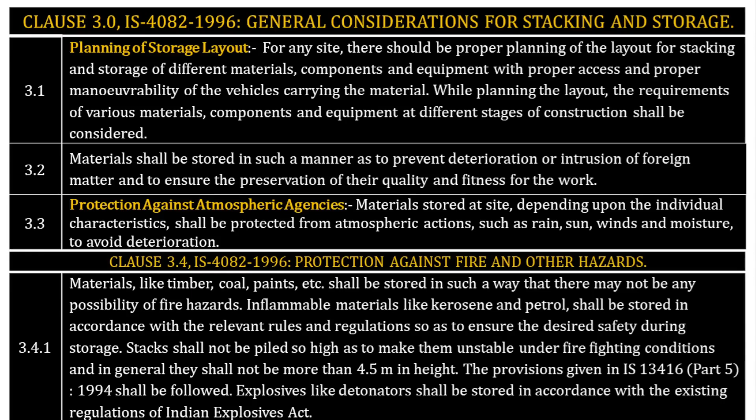Continuation of 3.4. 3.4.2 Materials which are likely to be affected by subsidence of soil, like precast beams, slabs and timber of sizes, shall be stored by adopting suitable measures to ensure unyielding support. 3.4.3 Materials liable to be affected by floods shall be suitably stored to prevent their being washed away or damaged due to floods.

Clause 3.5, IS-4082-1996, condition of stairways, passageways and gangways. 3.5 Stairways, passageways and gangways shall not become obstructed by storage of building material, tools or accumulated rubbish. Clause 4, IS-4082-1996, stacking and storage of materials. 4.1 The stacking and storage of materials generally used in construction shall be as given in 4.2 to 4.28, which have been summarized in the form of a checklist in Table 1.

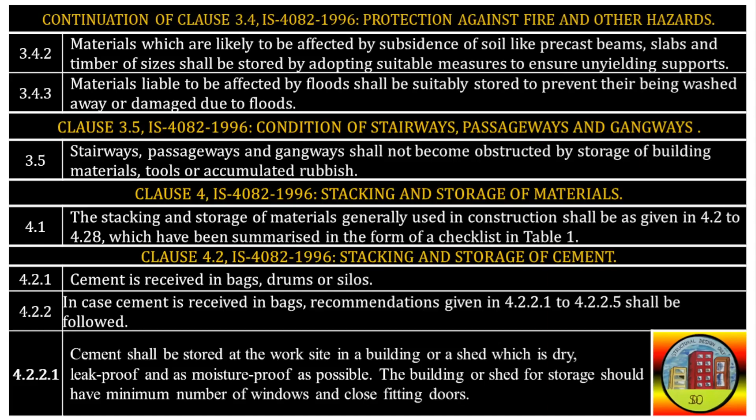Continuation of clause 4.2. 4.2.2.2 Cement stored and stacked in bags shall be kept free from the possibility of any dampness or moisture coming in contact with them. Cement bags shall be stacked off the floor on wooden planks in such a way as to keep about 150 to 200 mm clear above the floor. The floor may comprise lean concrete or two layers of dry bricks laid on well-consolidated earth. A space of 600 mm shall be left all round between the exterior wall and the stack.

In the stacks, the cement bags shall be kept close together to reduce circulation of air as much as possible. Owing to pressure on the bottom layer of bags, sometimes warehouse pack is developed in these bags. This can be removed easily by rolling the bag when the cement is taken out for use. Lumped bags, if any, should be removed and disposed of.

4.2.2.3 The height of stacks shall not be more than 10 bags to prevent the possibility of lumping up under pressure. The width of stacks shall not be more than 4 bags length or 3 meters. In stacks more than 8 bags high, the cement bags shall be arranged alternately lengthwise and crosswise so as to tie the stacks together and minimize the danger of toppling over. Cement bags shall be stacked in a manner to facilitate their removal and use in the order in which they are received. A label showing the date of receipt of cement shall be put on each stack to know the age of cement.

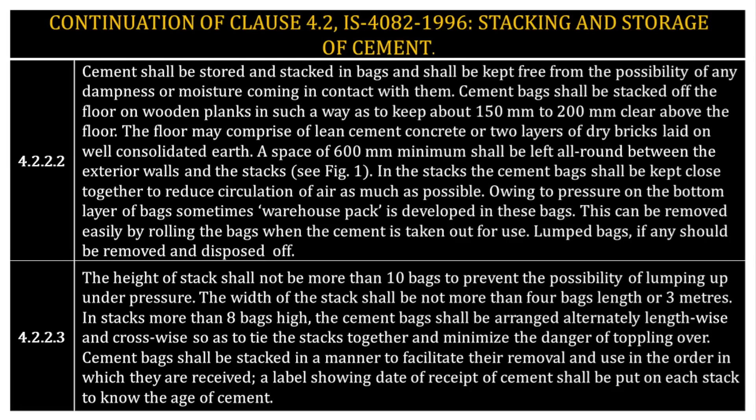This is figure 1 of IS-4082, typical arrangement in a cement godown. A, this is planks. B, wooden battens. C, bricks in two layers or lean cement concrete. D, 150 consolidated earth, below this. 1, AC sheet or GI sheet or any kind of weatherproof sheets. Number 2, load bearing wall. This is our load bearing wall. Number 3, 10 bags maximum. This is stacking of 10 bags of cement.

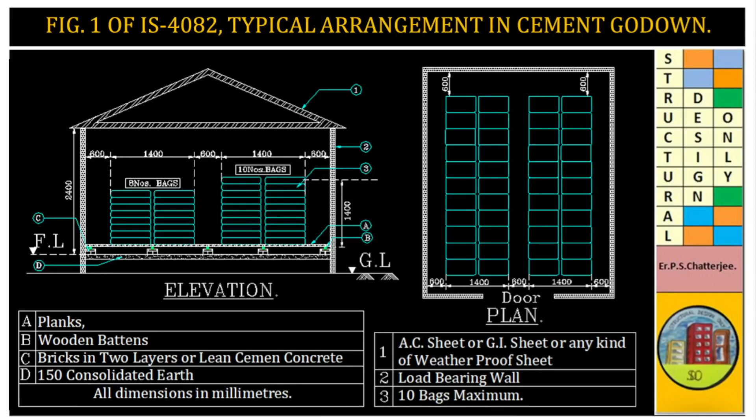Clause 4.2, IS-4082-1996, stacking and storage of cement. 4.2.2.4 For extra safety during monsoon, or when it is expected to be stored for an unusually long period, the stack shall be completely enclosed by a waterproofing membrane such as polyethylene which shall close on the top of the stack. Care shall be taken to see the waterproofing membrane is not damaged any time during use. 4.2.2.5 Cement in gunny bags, paper bags and polyethylene bags shall be stored separately.

4.2.3 In case cement is received in drums, these shall be stored on plane level ground as far as possible near the concrete mixing place. After taking out the required quantity of cement, the lid of the drum shall be securely tied to prevent ingress of moisture. 4.2.4 In case cement is received in silos, the silos shall be placed near the concrete batching plant. Proper access shall be provided for the replacement of silos. 4.2.5 Different types of cement shall be stacked and stored separately.

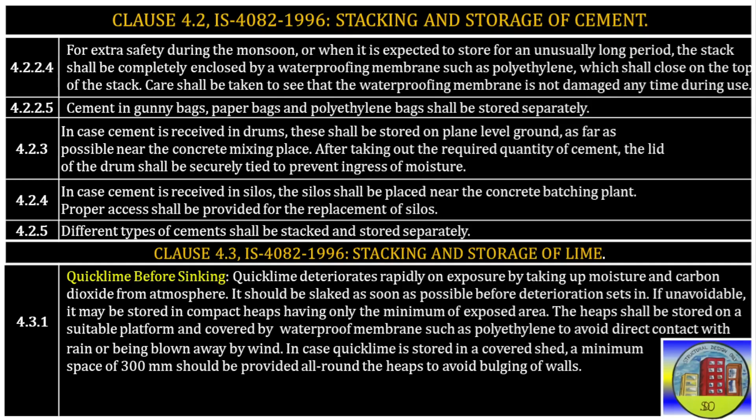Continuation of 4.3. 4.3.2 Hydrated lime. Hydrated lime is generally supplied in containers such as jute bags lined with polyethylene or HDPE woven bags lined with polyethylene or Kraft paper bags. It should be stored in a building to protect the lime from dampness and to minimize warehouse deterioration. The building should have a concrete floor and the least ventilation to eliminate drafts through the walls and roof.

In general, the recommendations given in 4.2.2.2 for storing of cement shall be applicable for hydrated lime. When air movement is reduced to a practical minimum, hydrated lime can be stored for up to 3 months without appreciable change.

4.3.3 Dry slaked lime. If the lime is to be used within a few days, it may be stored on platforms suitably covered for protection from rain and wind. If it requires to be stored for a longer period, not exceeding 2 months, it may be kept in a dry and closed godown.

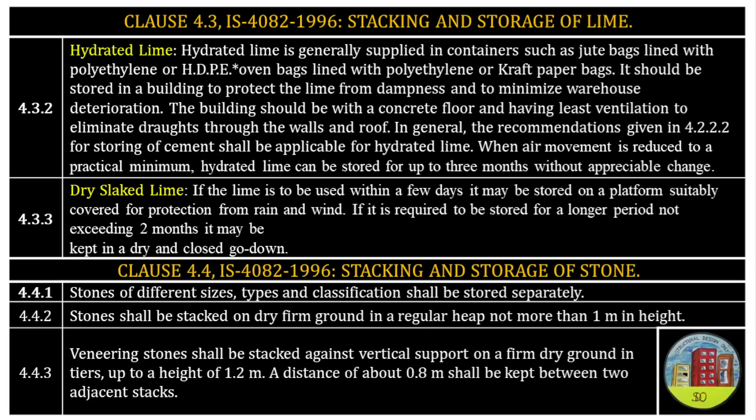Clause 4.5, IS-4082-1996, Stacking and storage of bricks. 4.5.1 Bricks shall be stacked in regular tiers as and when they are unloaded to minimize breakage and defacement. They shall not be dumped at site. 4.5.2 In the case of bricks made from clay containing lime kankar, the bricks in stack should be thoroughly soaked in water to prevent lime bursting.

4.5.3 Brick stacks shall be placed close to the site of work so that least effort is required to unload and transport the bricks again by loading on pallets or in barrows. Building bricks shall be loaded or unloaded a pair at a time unless palletized. Unloading of building bricks or handling in any other way likely to damage the corners, edges or other parts of the bricks shall not be permitted.

4.5.4 Bricks shall be stacked on dry firm ground for proper inspection of quality and ease in counting. The stacks shall be 50 bricks long, 10 bricks high, and not more than 4 bricks in width, the bricks being placed on edge, two at a time along the width of the stack. Clear distance between adjacent stacks shall not be less than 0.8 meter. Bricks of each load shall be put in one stack.

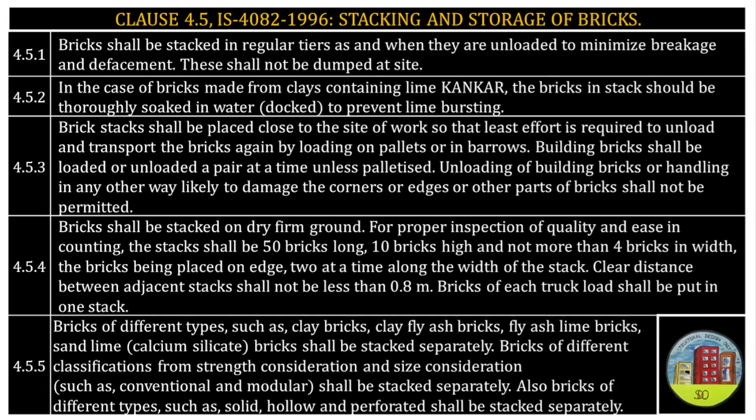Clause 4.6, IS-4082-1996, Stacking and storage of blocks. 4.6.1 Blocks are available as hollow and solid concrete blocks, hollow and solid lightweight concrete blocks, autoclaved aerated concrete blocks, concrete stone masonry blocks, and soil-based blocks.

4.6.2 Blocks shall be unloaded one at a time and stacked in regular tiers to minimize breakage and defacement. They shall not be dumped at site. The height of stacks shall not be more than 1.2 meters. The length of stacks shall not be more than 3 meters as far as possible, and the width shall be of 2 to 3 blocks.

4.6.3 Normally, only blocks cured for 28 days should be received at site. In case blocks cured for less than 28 days are received, these shall be stacked separately. All blocks should be water cured for 10 to 14 days and air cured for another 15 days. Thus, no block with less than 28 days curing shall be used in building construction.

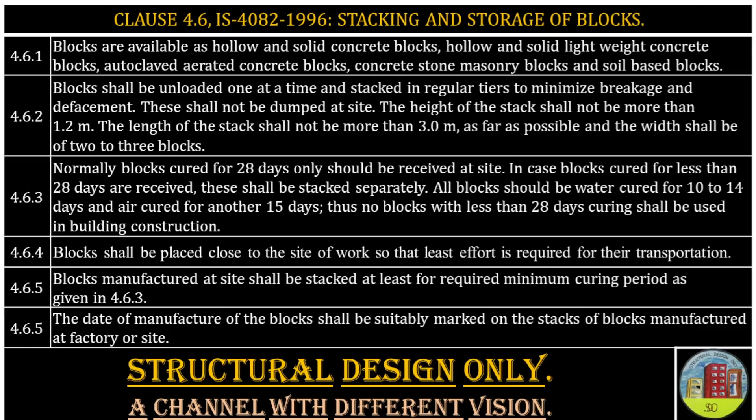And this is the end of the commentary, Part 5. The next video is on Clause 4.7, IS-4082-1996, Stacking and storage of floor, wall and roof tiles, and Clause 4.8, IS-4082-1996, Stacking and storage of aggregates.